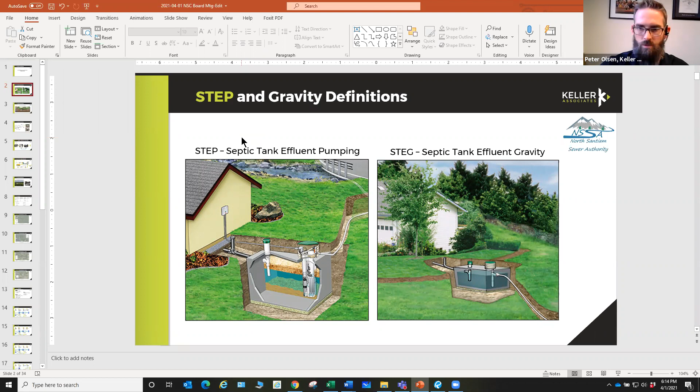When we talk about gravity pipes, lift stations, and force mains, this is a quick graphic just to show that. Can you see my cursor at all? Yes.

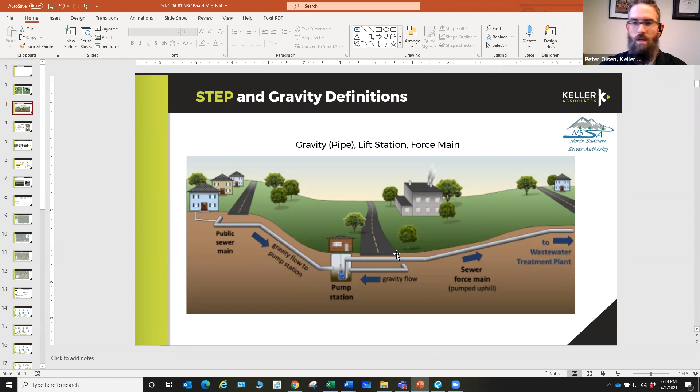So we have the gravity lines. They're controlled by gravity, it's got to go downhill. Those go downhill to a wet well at a pump station. These two lines come in to the wet well, and the other gravity main was down here. Then it's pumped out uphill. The only way the sewer flow is going to go uphill is by getting pumped. It's those basic concepts. When we talk about a gravity system, we're talking about gravity mains that flow downhill, and then they go to a wet well and get pumped where they need to be.

Grinder pumps are a form of a small system, similar to STEP. It's a pump system, but instead of retaining the solids, the liquid, everything is pumped out. Typically those get pumped out, it's a small system here, you can see the footprint size. It gets pumped up the hill to a gravity main.

That's another concept when you're working with gravity collection systems. Not everybody can flow out of their property by gravity. Some of them are just down by the river at the very bottom, and you're not going to get that by gravity out of there. So you've got to have some kind of pump system to get it up the hill, and every good gravity system has a couple of those.

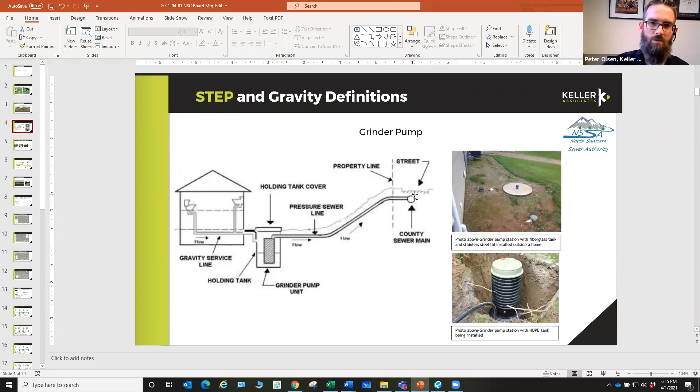And then talking about treatment - this is the existing Mill City water pollution control facility, the wastewater treatment plant there. It's a recirculating gravel bed filter. It has some screening up front, and this comes from the pump stations. Because the Mill City system is a STEG, it has gravity lines that all go to system lift stations that pump it over to the treatment plant.

So it comes from the pump station, gets screened, goes into a recirculating tank, a big tank, and that gets pumped, metered into the gravel bed filter system, and that flow is recirculated. That's the treatment process, very basic, very simple. When it's done, it sends a certain amount of flow out to the drain fields on a constant rate, so you're recirculating more than you're sending out to the drain fields. That's what the existing Mill City system is.

It's not high tech, it doesn't provide a high level of treatment, and this would not work to send it out to the river. You need a higher level of treatment to send it out to the river.

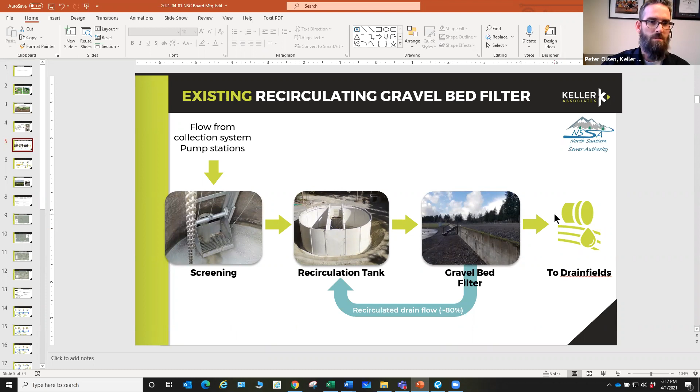Mechanical treatment plant - this is the higher level of treatment. You have your screening up front. When it comes in from the system, you have grit removal, and then it goes to a biological treatment process where you starve it of air, give it air, mix it, maybe add chemicals, and then the solids can recirculate as well. Those solids get hauled to a landfill. If you're a big enough plant, you have more processing, dewatering, things like that, but for the size of these plants, it's going to be hauled to a landfill.

Then you get membrane tanks where it's filtered. If you are doing infiltration basins, more than likely that would be the end of the process, and you would discharge to the infiltration basins we talked about with GSI previously. If we need to discharge to the river, it needs further treatment - tertiary treatment, which would typically be sand filters, UV disinfection, and then discharge to the river. So it's a higher level of treatment to go to the infiltration basins, and then another higher level of treatment to discharge to the river.

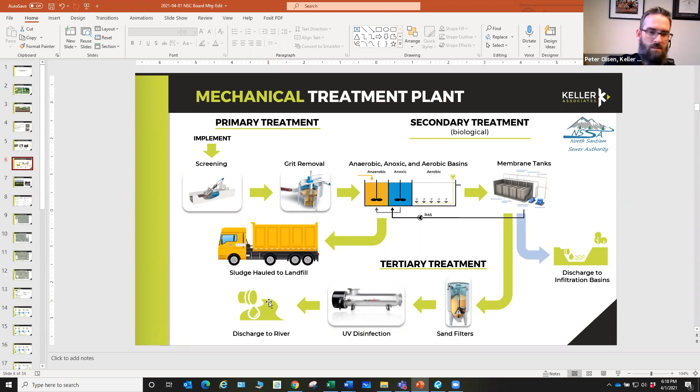I wanted to differentiate between an infiltration basin and a drain field. A drain field is what every individual home has - that subsurface drain field. You can see the pipes over here in a gravel bed. The water gets metered out of there as it leaves the septic tank and infiltrates into the ground.

With an infiltration basin, the concept isn't much different, they're just open. You can see these three basins back here. Those are infiltration basins that you discharge the water to and let it infiltrate into the ground.

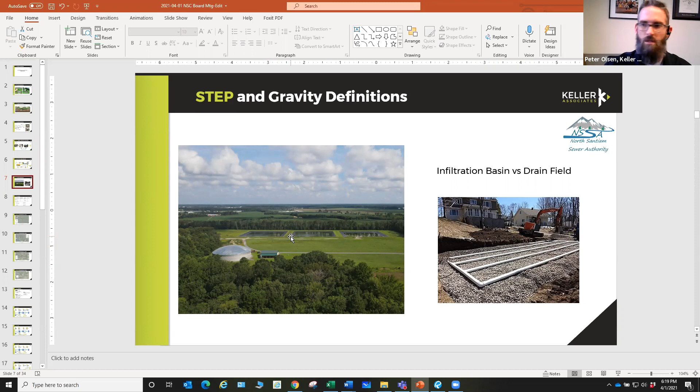Nothing more to say there.

Last one before we dig in a little bit to the collection systems is step versus gravity. There's a lot of debate, and I'm not going to get into a lot of the nitty-gritty details here about step versus gravity. There's a lot of arguments both ways.

This just highlights some of the differences. This figure was from a very old document, from the 90s, from an EPA document. I wasn't quite happy with it, so I added all these other considerations that you need to think about when you're looking at a step versus a gravity collection system.

So some of the concepts here: a gravity system has to go downhill, I've already mentioned that. Your construction costs are going to be higher, you're going to be deeper. And I liked what this did say though, rocky, high groundwater.

Sound familiar? In the North Santiam Canyon, rocky, high groundwater, if not boulders the size of a truck or something. You're going to be dealing with that, and that'll increase the construction costs. Whereas with a step system, you can stay right at 4 feet, 3 feet, 4 feet below ground level and just cruise right along. You don't have to go down to that 10, 15 feet deep. That's a benefit that gets you a lot lower construction costs.

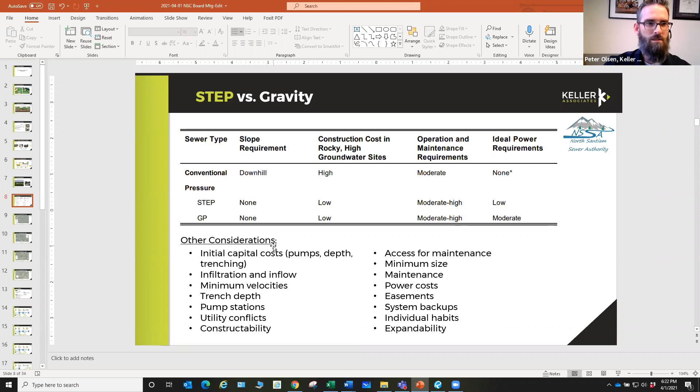So that's a whole lot, kind of a smattering—I threw it at the wall. Take it for what it's worth, and that just kind of whets your palate, gets you ready for the rest of the discussion. Any questions real quick before we move forward with looking at the collection systems and the scenarios?

I was just wondering about tanks, the size of tanks that would be compatible with either system.

That's a big question that's coming up, so you can answer that later and just move forward, but just keep that in the back of your head.

Yeah, and I don't have a specific tank size. Dallin, is there an average size you'd say, it's all based on bedrooms, I know, but... Yeah, and that's where the way we've looked at the scenarios is utilizing existing tanks, and then pumping out of those tanks, which then you can have a much smaller system connected to that, or the pumps right in the tank.

I'm not going to spend a lot of time on the collection system layouts. Just letting you know we've thought through it. We got out the CAD drawing software with all the surface elevations and got pretty detailed in how we laid this out.

This is for a gravity system, not for a step system. For a step system it's much easier—you just put it out in front of every place and run the pipes right along there. It becomes a much simpler layout in concept.

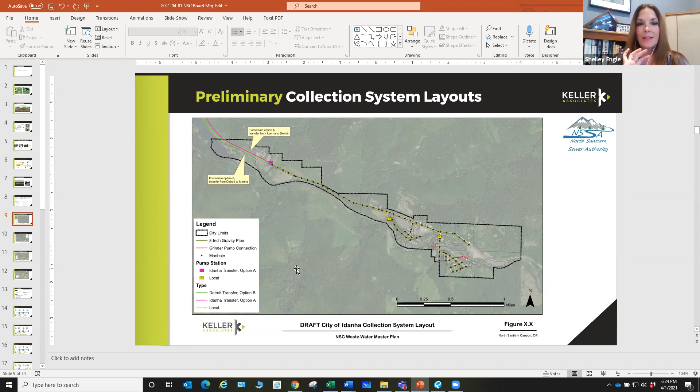So to clarify, this is if it were a gravity system only—this is a gravity system for the Detroit to Idanha system. Correct.

We'll zoom in a little bit. I figured you weren't going to be able to see that unless we zoomed in more. The red are locations where we're assuming there will be a grinder pump.

As mentioned earlier, those are locations you're not going to gravity out of. So we have local lift stations for this area, gravitating to that lift station. It pumps it across the river. A lift station here pumps it up to the highway, and then it's all gravity down to a central location.

These green and pink lines, whatever you want to call them—one is green if it was pumped from Detroit to Idanha, and pink is if it's pumped from Idanha to Detroit. We're just showing two different options of what we're looking at, option A and option B. I'll give you more information on what those mean as we advance.

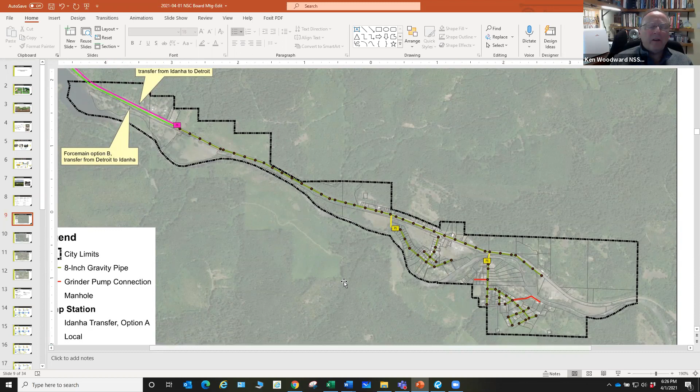Even if you did gravity in Detroit, you're still going to have a large enough tank and then pump it up into Idanha, correct? Correct. And when you say tank, it's a wet well, right? Yeah, it's another word for the tank.

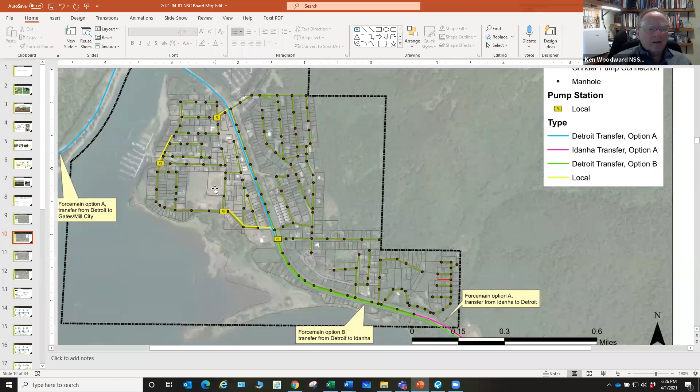We're getting fancy. A 55-gallon drum, you put it in the ground, let it get in there, and then you pump it up. Yeah, I don't know. Yeah, I know.

So this is the pink and green lines of those force mains, either coming from Idanha to Detroit to get pumped on down the canyon, or the green line is if it's getting pumped from Detroit over to Idanha to be handled in a treatment process there.

So this is the layout here. Again, one street—I should say, not location—looking at grinder pumps. Detroit's tricky, Ken. Oh yeah, very tricky. There's lots of little hills and gullies and all sorts of stuff, so we spent a good amount of time trying to lay this out.

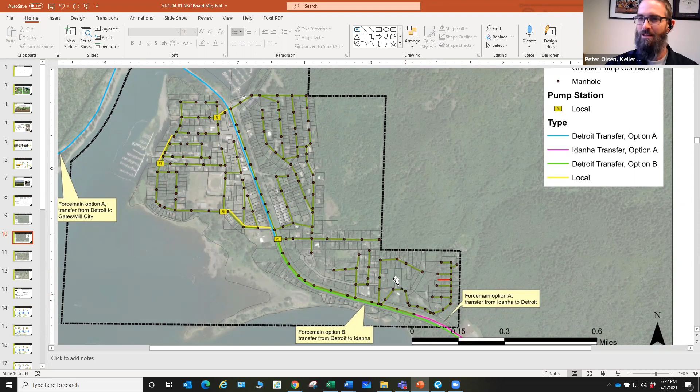That's Howie Street, I think, where you've got the red line. Yeah, that section of town was difficult, let's just say that. The streets all should have come down to a street here, and then it would have been perfect.

But that's Detroit. Gates has more pump stations than I would have wanted to see, and longer force mains, but again we spent a good amount of time picking these apart. Gates is a lot more flat, but that doesn't make it easier—those flats go the wrong way, or are relatively flat. They are sloped.

This pump station sends it out to Mill City, and this blue one is option A, coming all the way from Detroit. That'd be expensive—it's only about 15 miles down. Is that what we came down to? 17, yeah, 17.

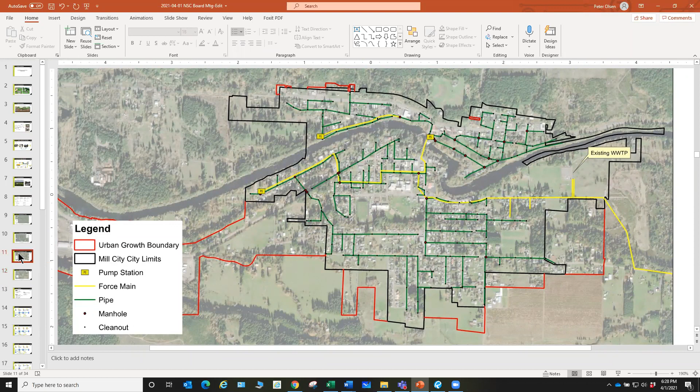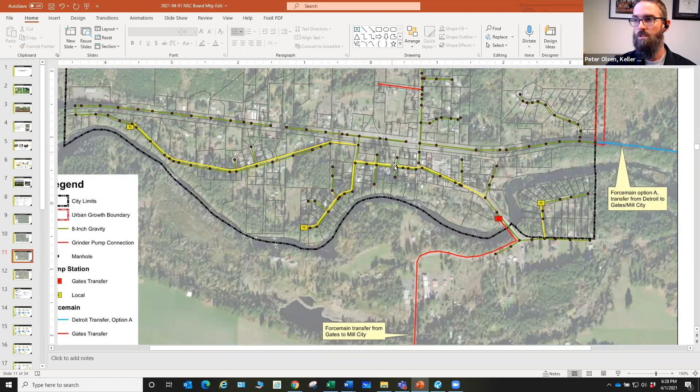Was that last one for gravity in Gates? Yeah, these are all gravity. All the collection system layouts are if it's gravity. If it's step, we do away with these yellow force mains, and you just have one pipe out in front of each home. We did need some grinder pump situation over here up Gates Hill Road.

All right, Mill City—this is really informational. This is the existing system; we're not rebuilding that. This represents the force main coming from Gates to the existing treatment plant location or area. I'll change the color before it gets finalized.

All right, moving on. Like I said, a lot of thought and picking apart and detail went into those, but those are not final design. I will remind you, these are very preliminary concept layouts, and when we get further along in the process, those details come out of exact locations in the roadways or right of ways and what that looks like.

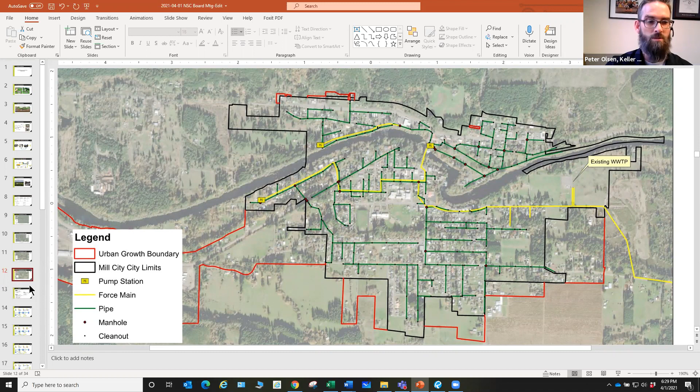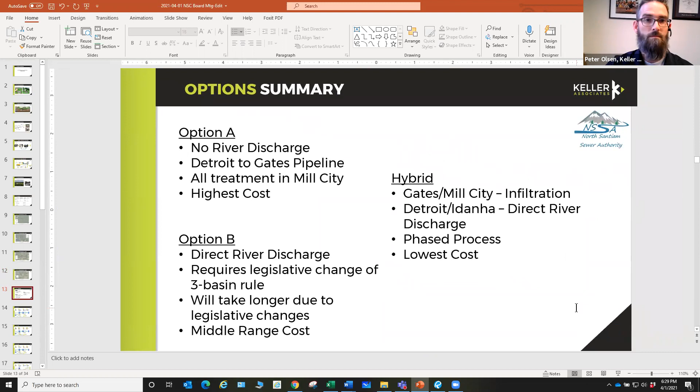So moving on, I got to zoom back out now. All right. Yes, sir. No, I'll ask later. Okay.

This is a high-level summary of what the options mean. Option A is if there's no river discharge, it has to go to groundwater infiltration, and that would require at this point a pipeline from Detroit to Gates. All the treatment would be in Mill City, and this represents the highest cost, for obvious reasons. That pipeline from Detroit to Gates is a major factor, obviously.

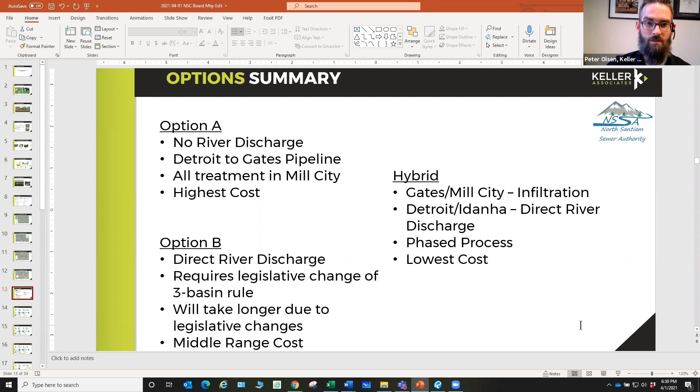Option B is if you're allowed to do direct discharge to the river, and that would mean adjustments to the 3 basin rule and changes. And that would be river discharge, only cleaned water. Yes, higher levels of treatment. It's the mechanical treatment that we were going over at the beginning of the presentation. This would be no raw effluent and no class A effluent. It's even higher than class A.

Well, we're not going to use class A. No, I'm just trying to get it clarified to everybody that's listening. I know. Heath knows what I'm talking about. I got my wrist slapped by the DEQ by saying class A. I know, I remember. But clean water. Yes.

That option B, because of the need to change the 3 basin rule, would take longer. That's not a quick process. I don't want to make anyone think that. Danielle's going to understand that process a lot better than me. That's not the focus of our discussion now, but that's what would be needed. This is kind of the middle range of the costs when you look at these options.

The one in between, it's always interesting to go through these processes of analysis. We had option A and B, and then we go, man, we got to have a hybrid, it can't just be A and B. So we designated this hybrid A/B, because Gates and Mill City, instead of river discharge, would do infiltration, which would work with the current 3 basin rule, whether through a rapid infiltration basin, the picture I showed earlier, or expanding the drain field well beyond the current water pollution control facility.

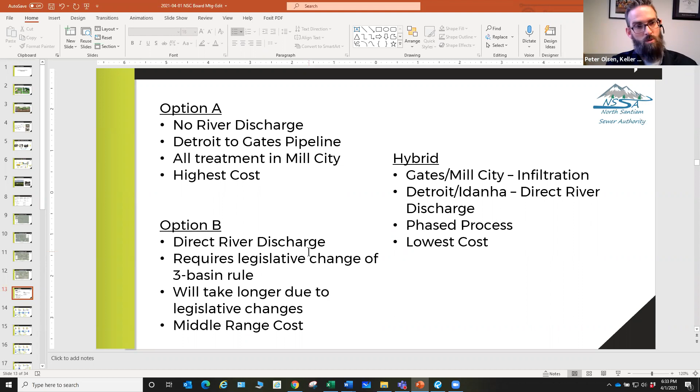So that's the overall. I want to show you pictorially what these mean, because we went deeper than just A, B, and hybrid; we also looked at STEP for Mill City, gravity for everyone else, different variations. That was the whole purpose of doing these life cycle analyses. There's 6 of them we're going to go through. For the hybrid we didn't do separate slides, but we have a summary at the end that shows all these and costs.

Option A, I got to zoom out a tad bit. So option A1, we are not discharging to the river. Mill City stays the same, and that's what Mill City does in every option. Gates, Detroit, and Idanha are STEP systems. I'll say one thing: while Mill City stays the same, that doesn't mean there wouldn't be modifications to their operations to accommodate the other pieces, correct? Depending on the treatment and disposal, yes. But they would remain with septic, STEP systems that need to be pumped out.

Dallin and I did look at potentially ripping everything out and starting from scratch, and I think everyone would run me out with a pitchfork. So we left that one alone. We did look at it, and the cost was so high that it's not something we're going to carry forward in any analysis or comparisons.

So Gates, Detroit, Idanha's are all step systems. They're all pumped, and then pumped and pumped, and then pumped again, all the way from Detroit to Gates and to Mill City, which then uses the existing, what I'm gonna say RGB, that's the recirculating gravel bed system, that filter plant, but split to a new mechanical treatment plant, which would dispose to the infiltration basins.

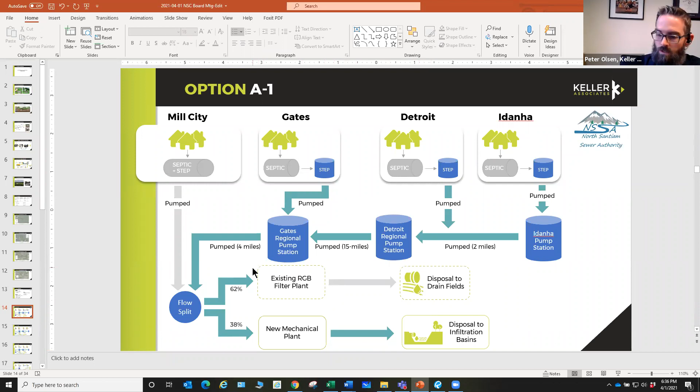And so this makes use of the existing plant. You do gain a lot of benefit there and cost savings, and the existing drain fields, which with some minor improvements, will continue to be useful and live long and prosper. So that is option A1.

So the difference between A1 and A2 is everything goes gravity except for Mill City. Like I said, Mill City stays, but Gates, Detroit, and Idanha go to a gravity collection system instead of the step system. So that's A2. And then the only difference between A2 and A3 is we changed Gates. And that's more important when you look at the river discharge. But to be consistent, we did this analysis that made Gates either step or gravity, while keeping Detroit and Idanha as a gravity or step.

Option B is direct river discharge. And again, we did a similar analysis as A, right? A1, A2, and 3. B1, B2, and 3 are the same except you have river discharge. And so B1 is all step systems, but instead of being pumped to Gates and on to Mill City, Detroit and Idanha have their own mechanical plant, with high levels of treatment, and discharge to the river. And because it's discharged to the river, the existing RGB plant, the existing Mill City plant, is not a high enough level of treatment. You need a new mechanical plant and then discharge to the river.

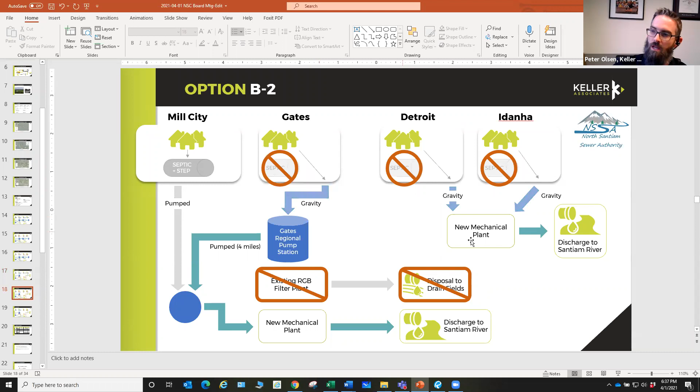B2, again, is the same as A2, except you have the river discharge in both situations. All the new collection systems are gravity. So pictorially, that's what it looks like. And then again, B3, we just changed Gates to a step system to see what that changes. If you're discharging to the river, it doesn't really change your treatment. You still need a higher level of treatment, even though you're pulling out the solids in the system. And that higher level of treatment will then create additional solids as it gets cleaner water.

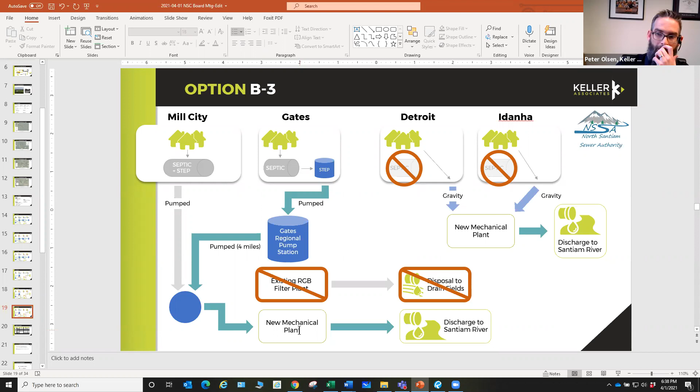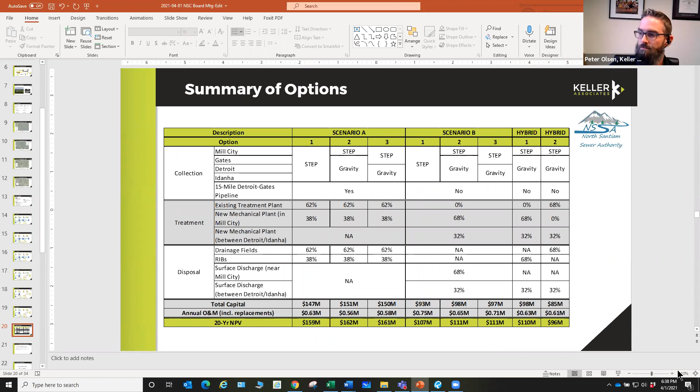So that was a quick run through of all these options, A and B. And then as I mentioned, the hybrid. Want to look at now the summary of options. This hybrid 1 and 2 option here, they switch it so you have the infiltration in Gates and Mill City. So you're doing a non-river discharge, which is permittable today with the 3 basin rule, and then have the river discharge in Detroit and Idanha. The difference between 1 and 2 is whether you have a mechanical plant or not in Mill City. With Detroit and Idanha, hybrid 1 and 2 both require a mechanical treatment plant to discharge to the river.

As you can see, the numbers with scenario A with the Detroit to Gates pipeline are significantly higher. And I will mention also these dollar amounts reflect a 20-year life cycle. So we also looked at that 20-year growth. As you get the system day 1, everyone in the city hooked up, there's also going to be expansion over the 20 years as there's new connections and new pipelines. That's also incorporated into the total capital cost because it's net present value.

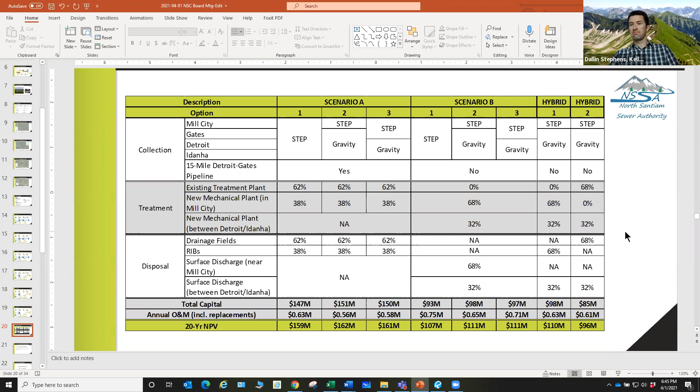Peter, I have a question. This is Dale Weesey. The O&M numbers, do they fluctuate between manufacturers at all? Or is that just kind of a standard average baseline of systems that have been installed over time? This is baseline average. Every system, and I do know Bill with Orenco is listening in here, but every system's going to have slight variations and differences, and Orenco can tell you all the great things about Orenco and why they're better. Everyone's going to sell you on different things, and Orenco's a great system. I'm not saying anything negative there, but each one's going to have its differences.

It's like if you buy one pump from a manufacturer versus another one, its lifespan, and what you have to do to maintain or not do to maintain is probably the more important thing. You don't want to touch it. So there's going to be slight differences in how it operates, but really, I would say the bigger aspect to that, Dale, is individual users.

When you go from a gravity system, you flush it and it flows out and it's gone. Whereas with a step system, or even septic tanks right now, if someone flushes things they shouldn't, they're responsible - they're the one mucking up their own system. When it goes to a community system, but they still have these septic tanks, it becomes the community system's responsibility to operate and maintain. If there's excess, if people are flushing things they shouldn't be flushing, that then becomes the community system's responsibility. So there's a lot of implications there, and a lot of education that goes into that as well.

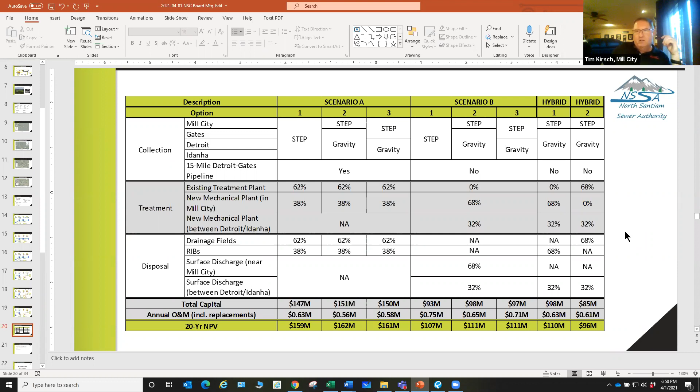Well, I know with Mill City's system, it was supposed to be a 25-year system, and we were replacing pumps at 12 years and rebuilding lift stations at 15, right? So there was a lot of that, and we're 28 years in now. We're looking at doing some upgrades right now, and if this takes too long, we're going to end up putting some money into it anyway. So we're looking real closely at what you're coming up with right now to help guide us in what we do in the very near future. If this is going to take any time at all, we're going to have to do something immediately.

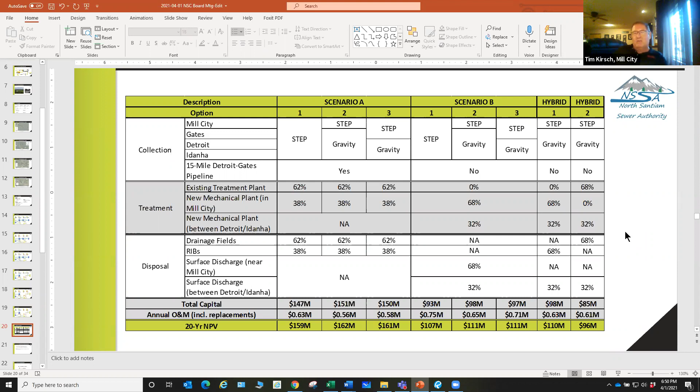But my next question was on discharging into the river. One of the things we're seeing right now with the Corps of Engineers and Fish and Wildlife is they're looking to do some improvements to the reservoir for temperature control. So temperature pollution is a big deal right now - is that discharge into the river going to cause temperature problems? It's on our radar, that's a very common issue. It's becoming more and more prominent. We've worked with other communities to deal with the temperature that's discharged with the effluent, and there's different ways to combat that.

I'm sure that it will be an item that the DEQ will be looking at in the permitting process. I can guarantee that some people are going to stand up and take notice and say something about it.

Just cool it down before you dump it into the river. Well, yeah, throw some ice in it. Maybe it's complicated. You try and do the right thing, but you get some chillers out there and all of a sudden your carbon footprint just doubled, tripled, whatever. It takes energy, it's energy hogs, and you look at wetlands, then your footprint, literal footprint, just expanded dramatically.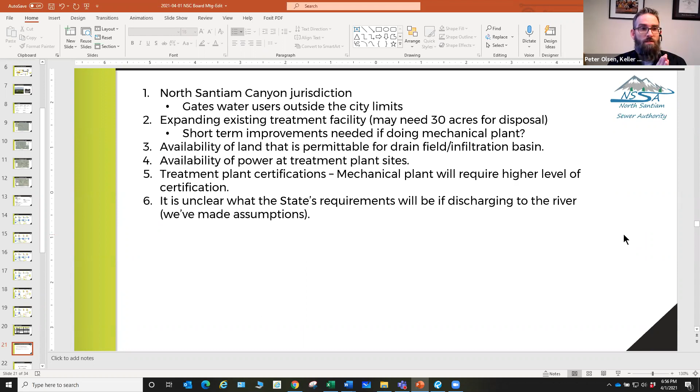So we can do two different things: continue answering, or go to what I have shown up here right now, which is just assumptions, items that Dallin and I were looking at. One thing I wanted to mention, Danielle, we emailed about this: the North Santiam Canyon jurisdiction is limited to the city limits. I should have clarified this earlier, but we can make this adjustment now. The city of Gates, their water system extends outside the city limits across the river.

And what I heard is, no, it has to stay within the city limits. I know that was a specific question we had gotten by email through Shelley about what's going to happen with the south side of Gates. So jurisdiction is city limits, but that doesn't mean we can't offer that service.

That would be a question then. I guess there's two questions. Does the state allow for that in an unincorporated area that's inside the UGB? That I don't know, whether they allow for urban services, I guess is my concern. And if the cities are offering that service, that would potentially be an additional service outside the immediate jurisdiction. We've talked about planning for that, right? So planning for if the Forest Service was interested in connecting down the road, that kind of stuff. So maybe we need to dig in a little more on what the state's going to allow, because we don't want to eliminate potential funding if we end up having to fight with LCDC.

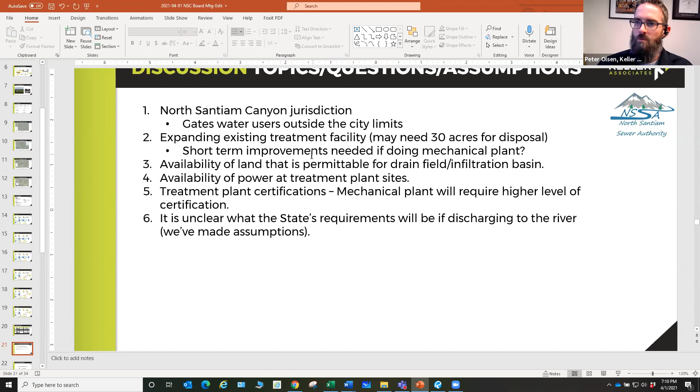I don't know that I want to hit on what I've got up here very much as far as these discussion topics. These are really just things we need to deal with, making sure the power is sufficient to get to where the pump station locations and everything are. These are all design and facilities planning study topics.

Dallin hit on needing the acreage. If we're doing additional drain field, it could be quite a significant amount of drain field.

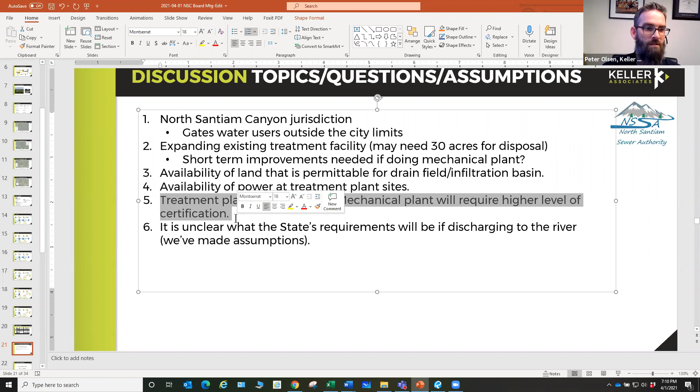Then the treatment plant certifications for a mechanical plant—it takes a much higher level of certification, and operators are not plentiful. Heath could talk about that. It's a struggle in the industry to find appropriately certified operators, and that's a challenge that will have to be dealt with.

Then the state's requirements for the discharge to the river—we can't get it out of them, so we've made assumptions. We feel they're pretty reasonable assumptions, but that's just it. You asked about the temperature—that's one of the assumptions, right? We understand that's probably a factor there.

I'm going to throw Penn under the bus for a second—he offered the idea of a snow park. We could really cool that water. A snow park, that's not throwing me under the bus, that's a great idea, I think it's fabulous. That could be right behind the CC camp facility if that's where the facility is going to go. There's a lot of property back there. Make it an indoor one and I think you're sold. But then again, you need much bigger chillers. Much bigger. Yeah, that Idana Ice is going to be changing their business plan, I think.

So, tell everybody that they won't buy the ice.

No, right. So I'd like to move on in the interest of time because Gordon's got important information to present to us. I don't want to avoid questions, but at the same time I do want to get there, and maybe we circle back later, or push to the next one.

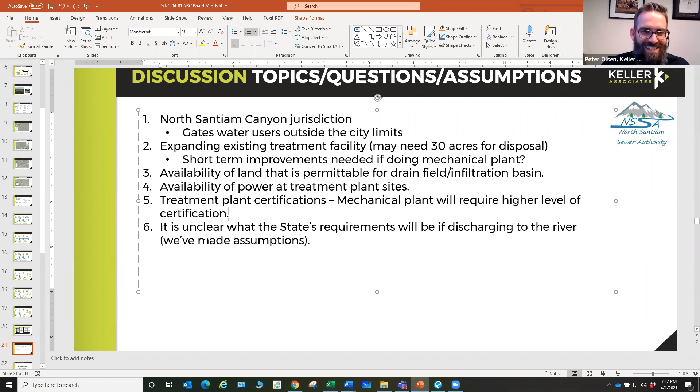So Gordon, I'm trying to get there. I'm trying to get there for you. I think we are there. Let me get to the next slide.

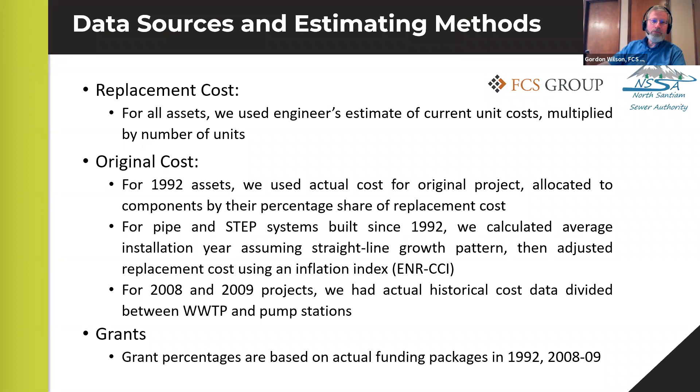Now, what's my recommended method? Here's what I'm suggesting. I do recommend the hybrid. My starting point, in a situation like this, is usually original cost. And that's the most basic and most real kind of thing. It actually happened. It's not an estimate. It's not hypothetical or theoretical.

And in this case, since we're trying to arrive at a credit for prior investment, I don't want to stray too far from the actual prior investment, what people actually paid. But at the same time, I don't completely want to ignore the avoided cost. I think it's important to acknowledge the value of avoided costs to an otherwise new regional system. The data source, as I mentioned, is stronger for the original cost, but again, I want to have some influence from the replacement cost analysis.

So I'm suggesting that we blend it so that the original cost is weighted 75% and the replacement cost is weighted 25%. You can see by those round numbers that it's not a scientific thing. I'm making a general assumption, but that's one that feels reasonable to me based on our purposes, which are to create a credit for prior investment, and based on how solid the data is, whether it's actual experience or whether it's an estimate.

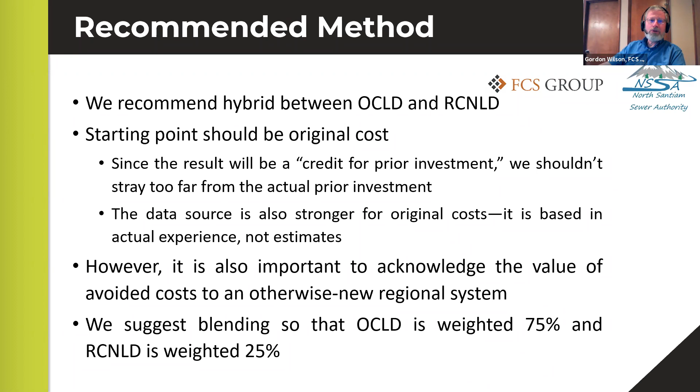But 25% of the way to is $6,859,000. If you do the same kind of calculation for the cleanouts and STEP systems and manholes, you're going to end up with 2.7 million. Same thing for the wastewater treatment plant, about 3.3 million, and the pump stations, about 1.3 million. The total cost for all those assets is about 14.2 million.